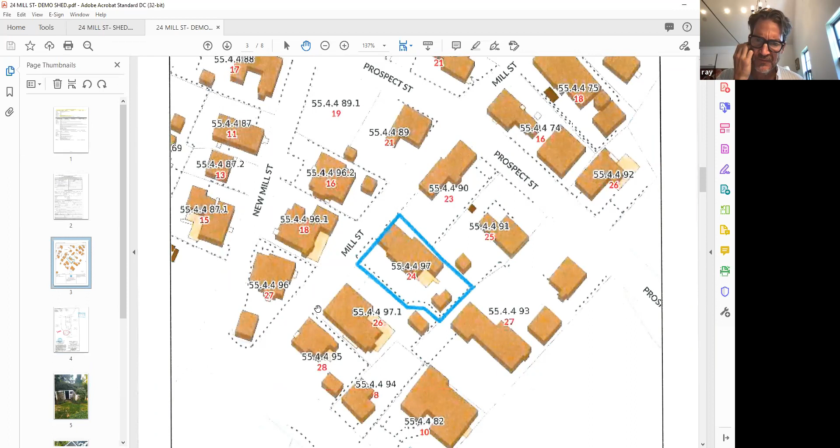Okay, so let's see, we just saw a site plan. Do we have a locus plan? And Holly, I know that you've probably got some stuff to say on this. Yes, sir, I do.

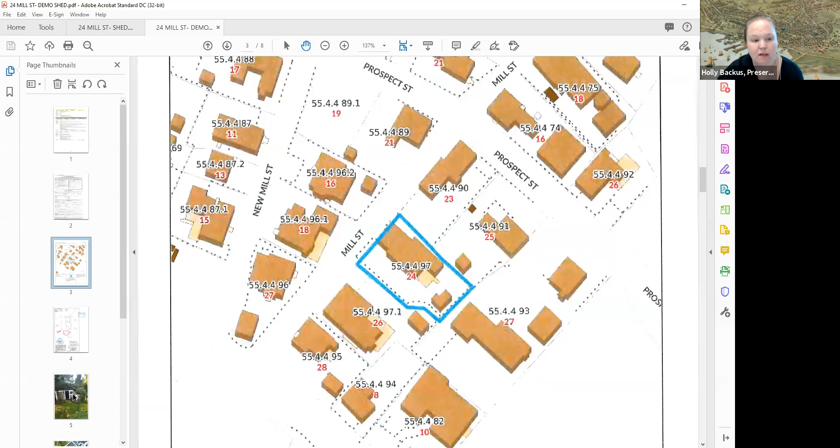So HSAB did take a look at this, as well as myself. They looked at this on August 9th, and their concerns are: what is the date of the existing shed? They would prefer to rebuild the older one rather than build a new one. I just want to note for the record that the main dwelling on the lot, per Mr. Lancaster, is dated 1834, and the NHA data indicates a 1900s cottage.

So I couldn't find specific information, but it would be nice to have some photographs of the interior of this cottage or this shed, as well as to be able to determine more information on that. Those are the comments, Mr. Chair. So can we see the whole package? Obviously, the package does not include interior stuff, right?

Okay, that's correct, that's correct, there are no interior photos. I don't know if this helps the committee date it at all, but I will say that the interior of the shed is almost exclusively made of plywood. So I don't know when that became available or when that was common to use for building a shed, but it is almost all made of plywood.

Well, that's actually good to hear, but we should probably see that before we move forward with this. So can you take some photos of the interior so we can go about this in an informed way? Happy to. Also, to that point, it looks to me like the door is sitting right at grade, so if you could take a picture of the floor—what's the floor, wood? Also plywood. The floor is plywood. Yes.

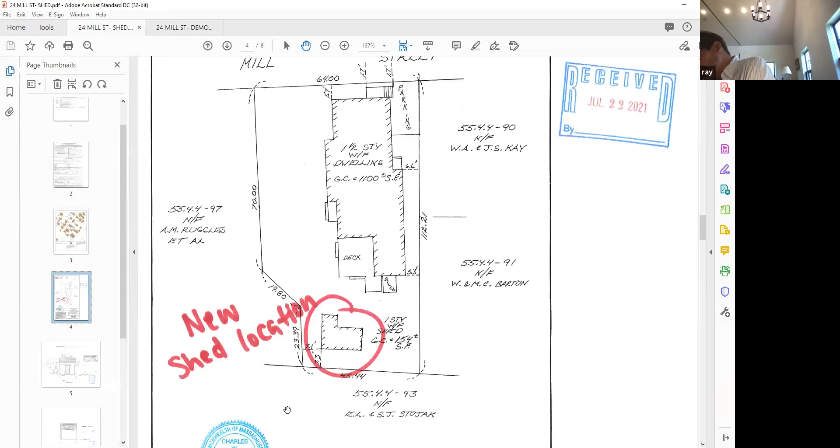Why don't we take a look at the new shed, just see what you got there. So these plans were, you can see the whiteout of the previously approved.

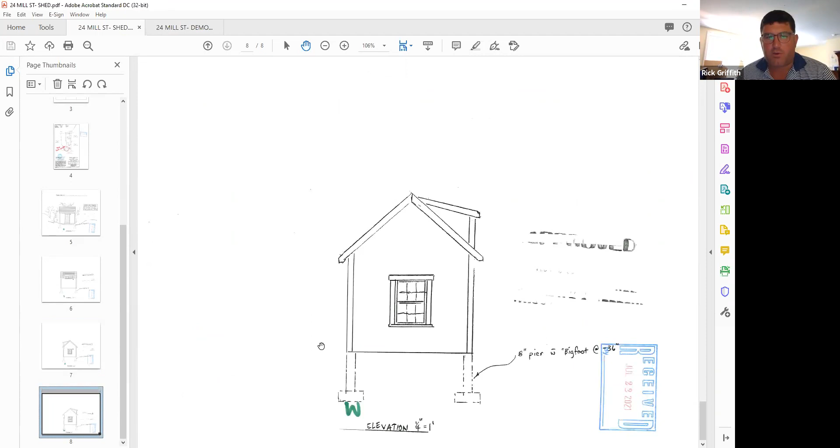So these plans were approved by the HDC, I think about 5 years ago. This is truly just a standard shed that is on a friend's property.

Oh, okay, so we didn't approve it for this location. No. Okay. Looks quite tiny. The only thing is it's about the same size as the current shed.

Really? The only thing that's changed is the height. I am 6'2", so when I go into this current shed, I almost inevitably hit my head on something. So the peak height of this shed, I believe, is 12 feet.

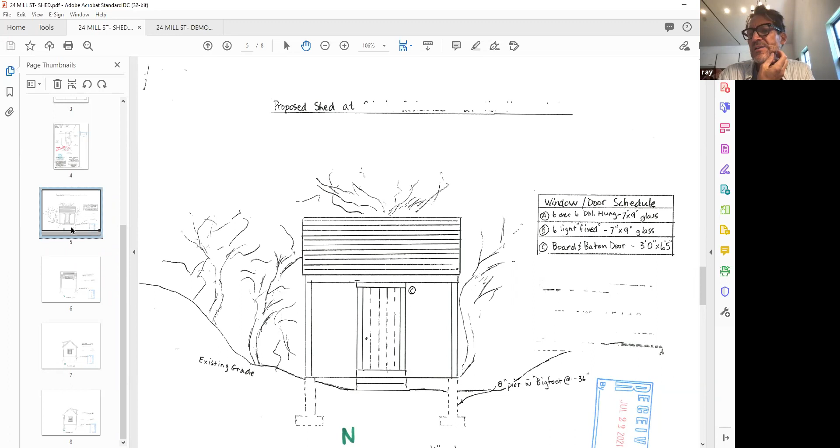So do us a favor, would you? Could you just take these little drawings of yours and put some dimensions on them? On the elevations, how high it is, how wide it is, et cetera, so we have a better idea. Yeah, happy to.

Or is that not? I thought it was on one of those. Maybe it's not on this one.

And Mr. Chair, I do have HSAB comments as well as staff comments. Great, go ahead. So HSAB said better drawings are needed to show the overall height and accurate window placement.

A better site plan is needed to indicate the exact location. And I concur, we need obviously clearer drawings, a more specific site plan. This is obviously the existing location of the existing shed.

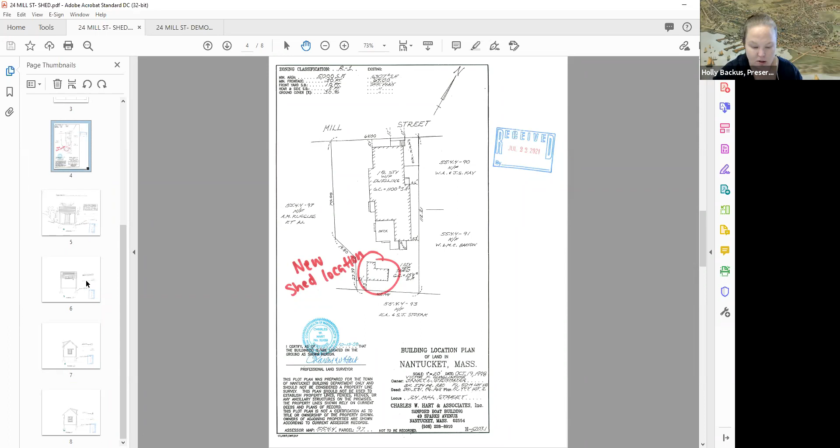Right, also I note that again, the main dwelling on the lot is a historic contributing structure. Right, and the architectural style really should emulate a little bit of that. And that are the comments. Thank you, Mr. Chair.

Okay, anybody, assuming that we get demo on the existing shed, I'd like to hear your comments on the new version, folks. Same board.

I think it's pretty basic. The only thing that's a little bit of an anomaly is the dormer. And depending which way it is facing, that may not be an issue.

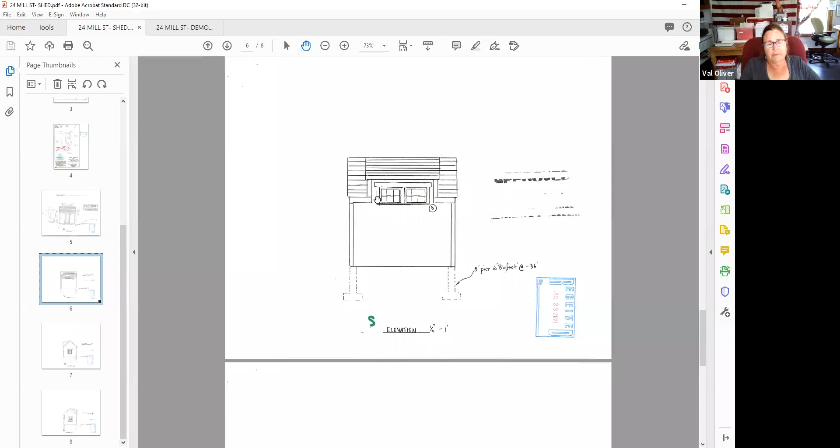I think it's facing the back property line. Is that correct? Yes, that's correct. Okay, so we would know that better if we had a site plan that showed the exact location of this.

Okay, that's it, Val, right? Yeah, okay, thanks. Abby, how about you? Yeah, I'm not in favor of this.

I'm waiting for information about the older shed. I believe it's probably turn of the century. I'm not sure about John's 1940 thing. Plywood could have just been put down to keep it intact. Looks like they shingled it at some point.

And I'm really tired of taking down these old buildings and then seeing these generic things come up. It's really sort of starting to get on my nerves. So I would probably not be in favor of something like this. Okay, thank you.

John: Yeah, the only thing I can say is my uncle had chickens also. I think it's appropriate. Okay, thank you. Diane: No, I'm a nay, for the same reasons that Abby is.

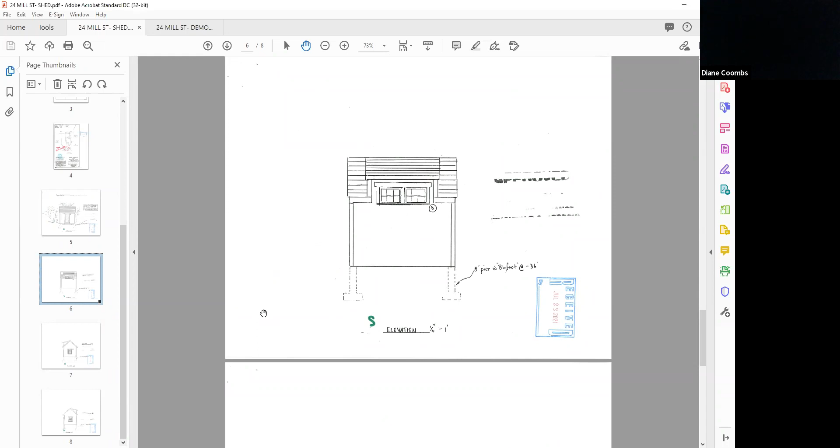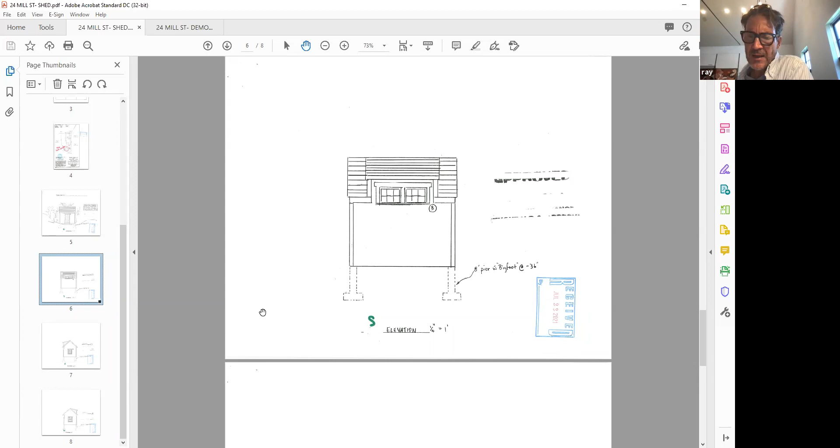Okay. So, all right, let's see the information on the old building and I guess we'll see what happens with this new building. So you have a few things you need to do to this just to clear up the application for us. And we will see what information you're able to provide us next time on the current shed. Thank you. So can I have a motion?

Motion to hold for more information. Sounds good. Thanks, Diane. On the motion: Val, Aye. John, Aye. Very good. Abby, aye. Okay, and Diane on your motion, aye, and I'm in favor too. So that motion carries. Thank you.

Let's see, driveway at 21 Pleasant, Edgewater. I saw Paul on there. Yes, I'm here. How are you? Very good. Good.

Okay, pretty basic. Recently purchased subdivided lot, just trying to put a new parking space in off Candle House Lane. One space, 14 foot on the street, 10 by 20, 10-foot deep brick apron. Used the neighboring property at 6 Candle House Lane to determine we should use brick as the apron. That's pretty much about it.

Paul, I'm hugely curious about this, and I don't ordinarily jump in. And we do have... Holly's going to speak to the HSAB stuff. Okay, why is it like 50-50? Why is it half brick and half gravel? I was just doing it for code, the 10-foot in depth. I would have no problem brick-ing the whole driveway. I think that would be appropriate. Okay, it just looks kind of weird. I understand, but I think a full brick driveway would actually be more appropriate.

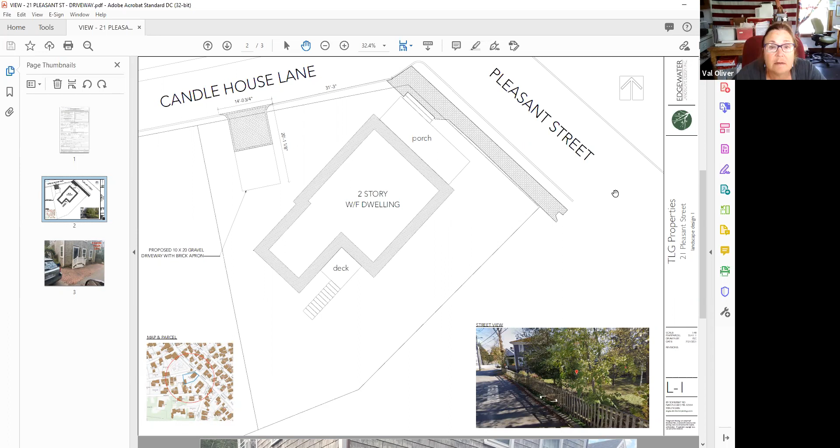I didn't drive down the street to see this. It looks though, from the photo which I was trying to blow up a little bit, the next door neighbor's parking - can you show the photo again - is brick. They just pull in like sideways, right? Right. Is that the photo that we're looking at right now? Yeah, that's right next door, I think. It looks like it's made out of concrete. The majority of the front is brick. There is that small parking area that does appear to be concrete, yes.

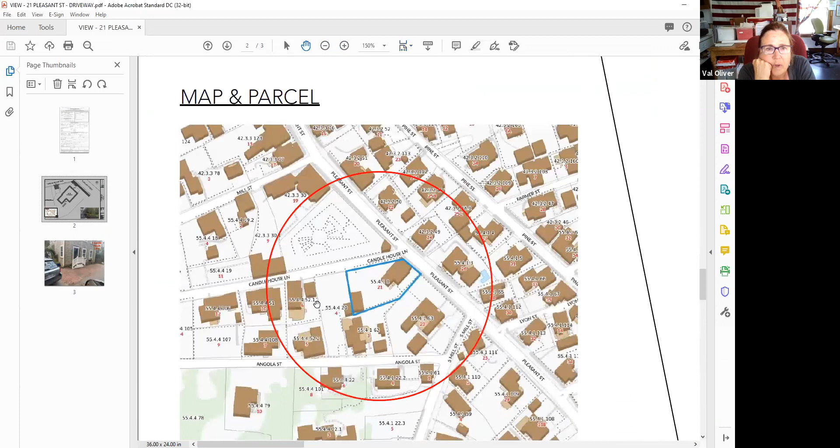Which I don't think we want to use concrete now. No, I'd rather not. No, of course not. But this would butt up to it, right? No, this is 2 doors down, so there is a lot between the two. Oh, I guess then I would just wait and see. I'd probably go by there and see what the other ones are.

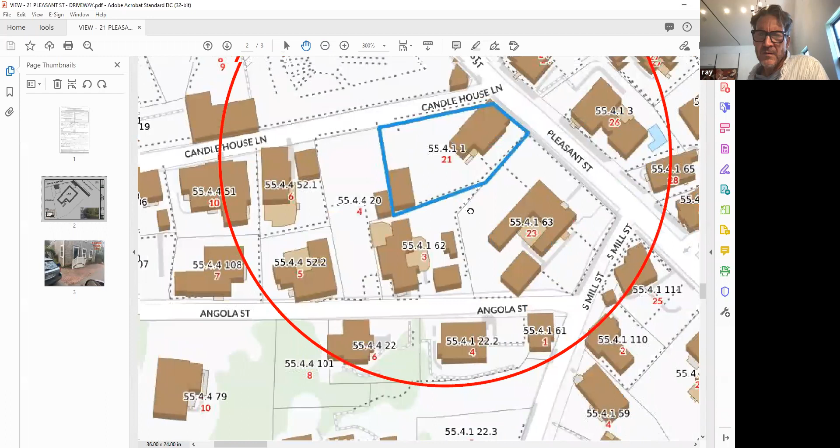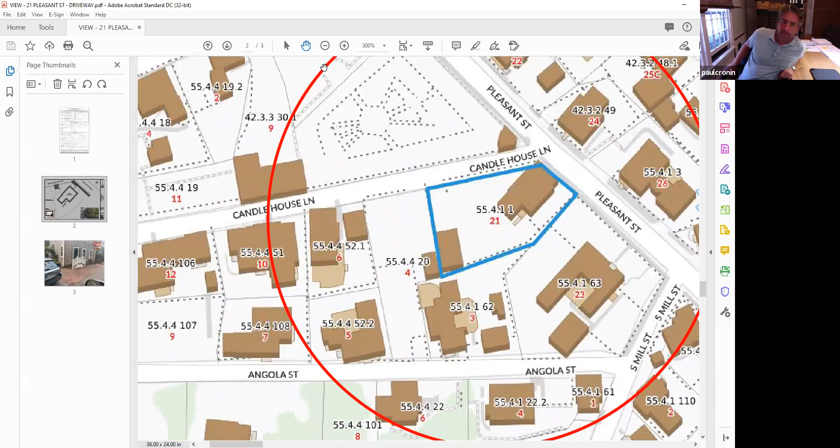Okay, I think brick or cobblestone would be fine. I think the whole driveway should be one material, so either all brick or all cobblestone. I'm with you on that one, definitely. Well then, I would go with the cobblestone, if that was an option. Sure. Now, when we say cobble, we're really talking about cobble, right? Not Belgian block? Not Belgian - that's block, no. Yeah, not Belgian block. Okay, just to be clear, because sometimes it gets muddy. Yeah. All right, Val, thank you.

How about you, Diane? Diane? Let's see, Diane there? Where's Diane? Diane, you're muted.

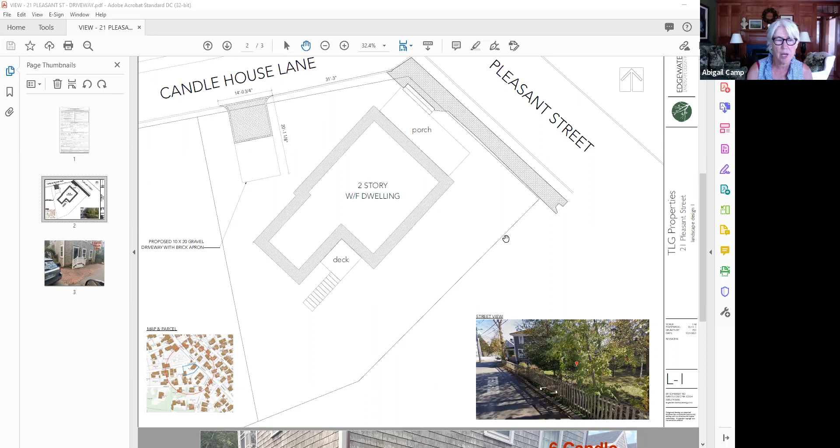Okay, let's go to Abby. I was curious about HSAB's comments about other driveways on Candle House Lane being cobblestone. I didn't know that, and if that's the case, I would go with cobblestone as well and leave the brick for Pleasant Street.

John? I'm in favor of that. Of it being cobblestone? Cobblestone, that's fine. Okay, so it hasn't quite come to a vote yet, but it looks like the vote might be for all cobblestone.

But I'm still trying to hear from Diane. Diane, you're still muted, dear. Can somebody unmute her, please? There, can you hear me now? Okay, now I got you. I don't know why it keeps doing that.

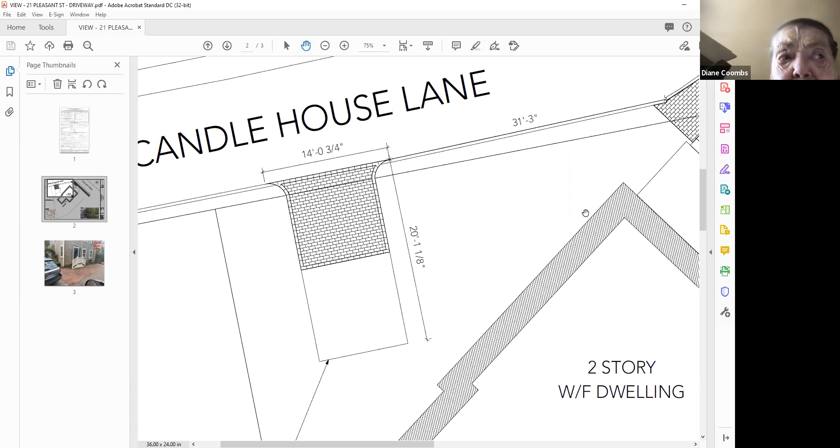Anyway, I would like to know what else is on Candle House Lane for aprons. I think the brick is too formal for Candle House Lane, and if I'm given the choice, just off the top I would take the cobblestones for that reason.

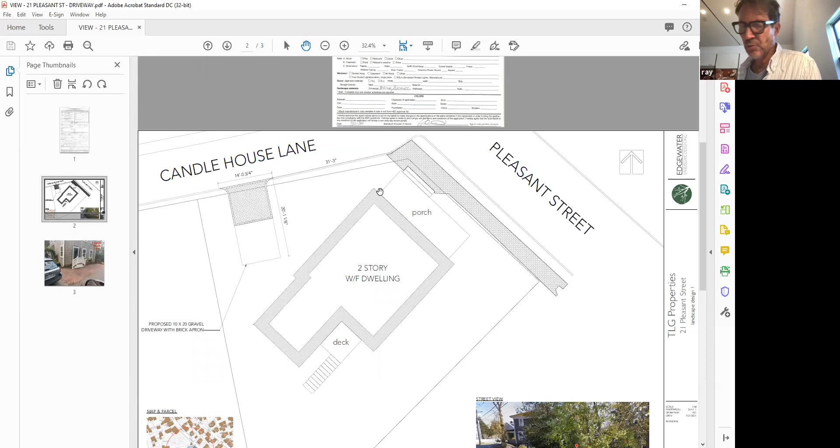Well, Diane, I think everybody's in agreement on this one, that cobblestone would be a good choice, and rather than it being 50-50, it would be 100% cobblestone. Right, 100% cobblestone. And I'll make that motion if you want. That would be great.

Thank you, and so Diane has made a motion to approve this as all cobblestone, folks. On that motion, Val? Aye. Very good, thank you. John? Aye. Great. Abby? Aye. Thank you. Diane on your motion, Aye. And I'm in favor. Fantastic. Thank you, Paul.

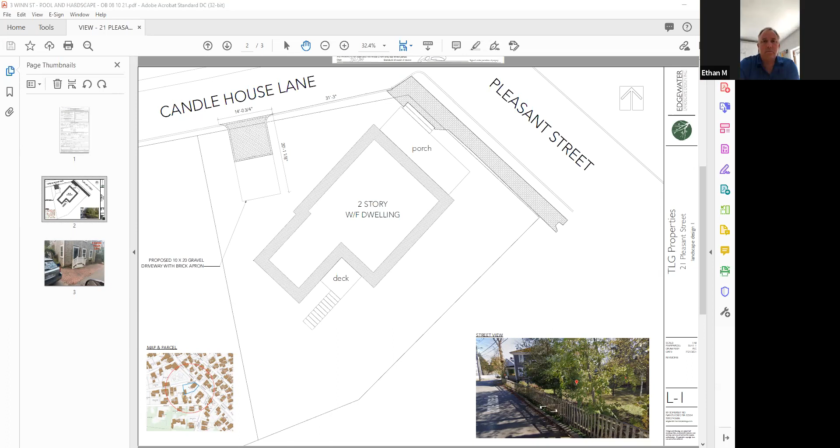All right, next up we're on to old business of August 10th, very short. Do we have somebody here to represent the 3 Winn Street applications?

Yeah, can you hear me? This is Ethan. Hello, Ethan. Yeah, hi, I didn't know I was on this because it said self and my name's not on there, so that's why I'm here now. Okay, go ahead, I'm here for the house.

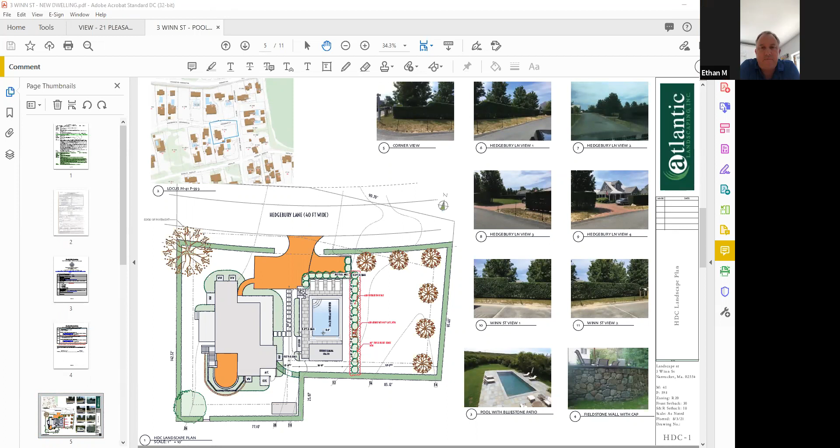So basically it's a second dwelling and the style is to match the main house. Oh, yeah, we're familiar with this because this was the pool thing that came up last Tuesday, right? So we're gonna actually hold the pool until this gets approved. It looks like the guest house is sitting right in the pool.

It's because we have all the setbacks on Hedgebury and the setbacks on Winn Street. We have to be 30 feet, so we have to put it in where it can go. Okay, all right, good enough. So I'm gonna jump off, I'm gonna just hold my application for revisions, if that's okay. Yeah, we'll hold it for you. Okay, perfect, thanks guys.

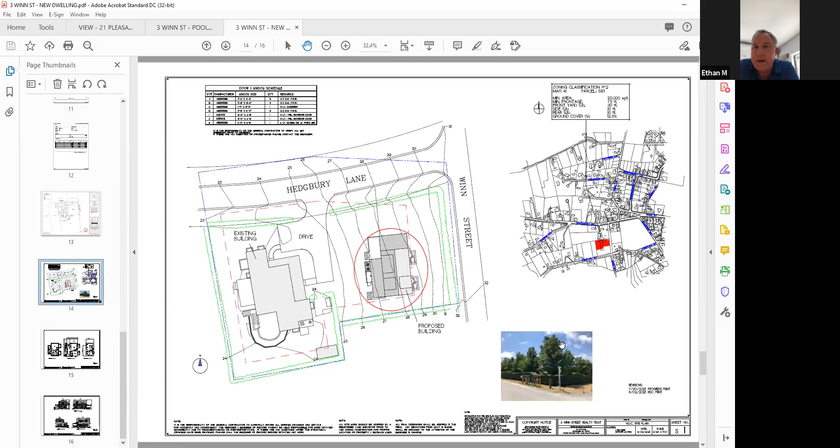Okay, so go ahead, Ethan. So basically it's a second dwelling, 22 feet high plus or minus, and the style matches the main house in all the architectural elements. That's it. Well, the location of it on the lot, that's where it can only kind of go because of all the setbacks and the grades and everything. So that's it, new house.

Is there a picture of the main house, Ethan? There is, if you scroll up. Oh, I included it, God bless. There we go. The only thing I didn't do is put the brackets on it. He doesn't like those, he wants to take those off. Eventually he's going to do something to the house. Well, we tend not to like those square brackets, we like them when they're curved. I'm just kidding.

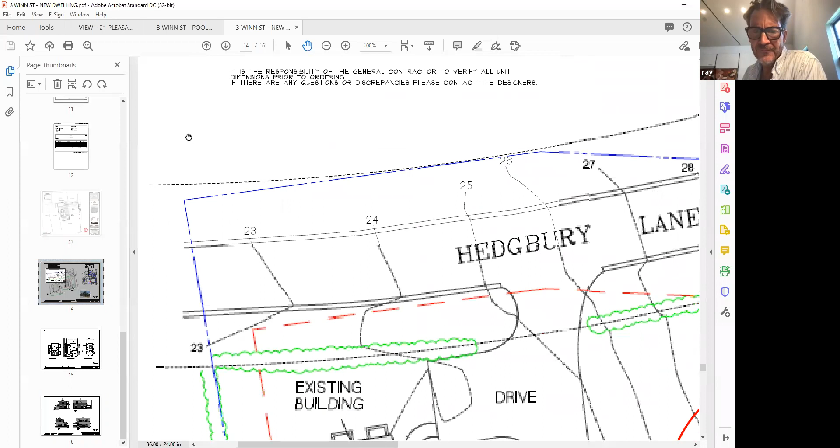So who wants to start? I just want to look at it again. I think it would be good to give it another look over. White trim, it's 22 feet high, correct. 22 feet, on the money. On the money, that's not on the money, often.

the north elevation, which is facing out to Nantucket Road? Yes. Okay, but this is back, so it won't be seen, right? Yeah, there's a photograph from the road, it's all vegetation, you can't see this. Okay, well from Nantucket Road you can't see it, you have to go right up to Hedgebury. Well, Hedgebury is a public road, so we have to think of that. Can I go over to the west elevation?

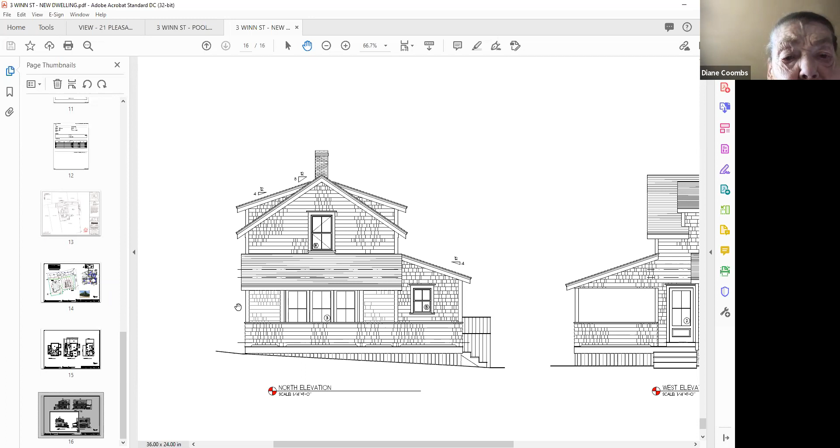Okay, I think on the west elevation, the 2 dormers up above, I'd like to see them brought in a little bit so that they weren't quite so wide. It will make the roof a little smaller to the eye. It's just a suggestion.

So now if I could see the east, there's the east, same thing with that. The dormers, I think with the house keeping it only at 22 feet, the small reduction on the dormers would be good.

And the south is the south sort of the front entrance? Yeah, well, looking, you can't, yeah, there's 2 entrances, so it's whatever they decide to use when living there. There's one and there's one around the corner.

So that's my suggestion at the moment. I appreciate the height that you got it, I appreciate that it is at 22 feet. I just would like to see the dormers reduced, which I think keeps the house looking small.

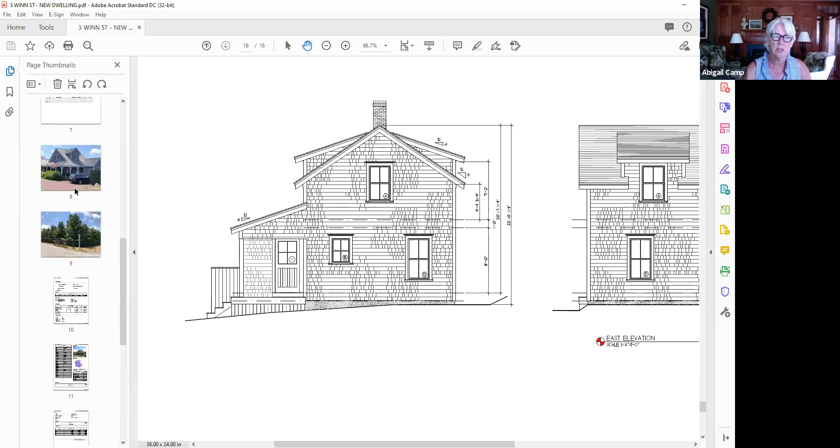Yeah, I think it's pretty adorable. My only question, I'd love to see them side by side, the main house and this, to make sure that the same details were the same, like maybe just the window. Are the windows the same size? Yep, everything's matching except for the brackets.

Very cool. And I kind of, I see those big dormers, but that does look oversized. I think I agree with Diane to bring those dormers in a little bit. Otherwise it's beautifully proportioned. Thank you.

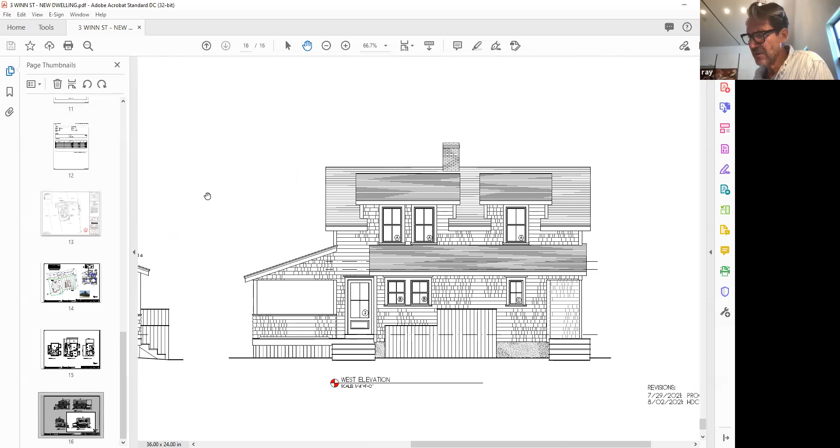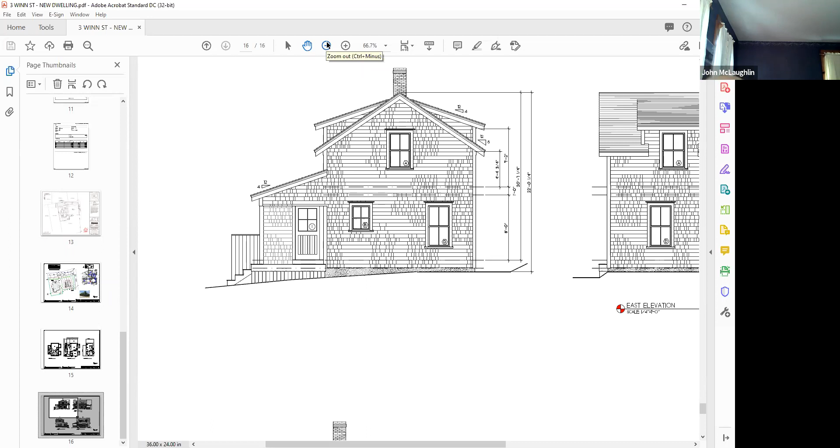Okay, very good. Thank you, John. And how about you, Val? I think it's appropriate.

Okay, so Ethan, can you give us a little sugar on this and make those dormers a little narrower? I can make them narrower, but because of code with the bathrooms, that's why the house is so short.

We're talking narrow in width, correct? Yes, I can do that with the west, I can bring it in a couple inches on either side, but the other one's kind of a toilet, and I need that 6'8", and it won't work. Otherwise, the toilet will be in the window, and I don't want that. That's on the east. But I mean, I can.

So you're suggesting keeping the east elevation the way it is, and doing the other one, just because of the bathrooms? I mean, you do understand what we're talking about, it's just bringing those corner boards in a little bit closer to the windows. Yeah, I can. That east one is a bathroom toilet. The other ones can come in 6 inches on either side, which would help.

Okay, that would be great. All right, so I'll make that the motion. Let's move it along. Was that a motion? Yes. Okay, so the motion is to approve this through staff, just taking the dormers on the west elevation and making them 6 inches narrower on either side. Did I get that right?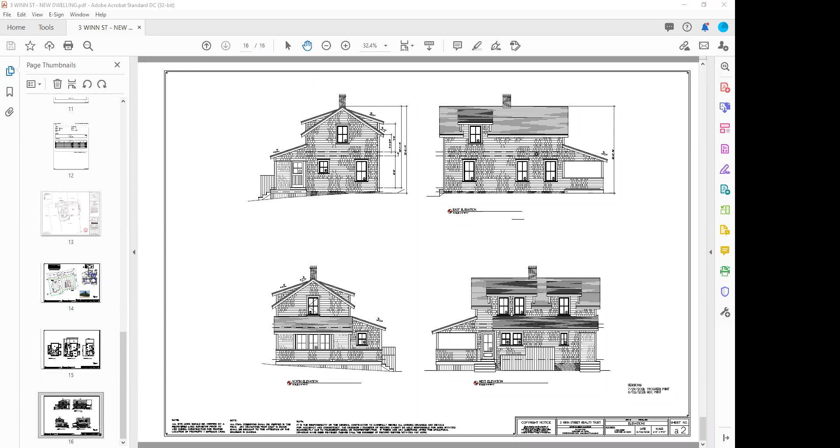My recollection is that Stephen was the one who pointed out he was looking at the house application, which we did not have, and said he had an issue because the guest house seemed to be in the same location where the pool is being shown. So the board was established for Stephen to make those comments, and then they held it for the house, which we just reviewed but had not yet been reviewed. So we need to hold this application.

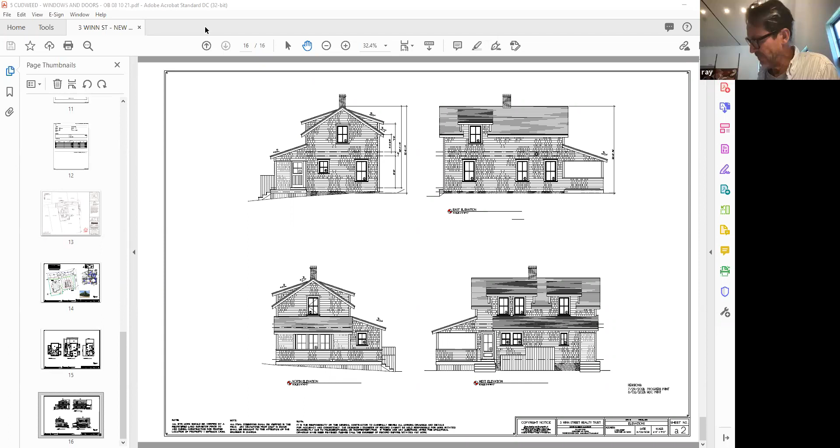So Stephen, can I have a motion to hold? So moved. On that motion: Diane, aye. John, aye. Abby, aye. Stephen, on your motion, all right. And I'm in favor. Okay, that's good.

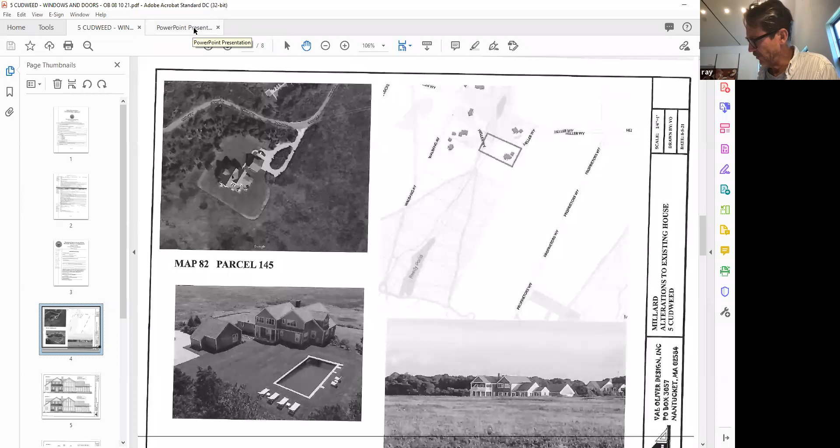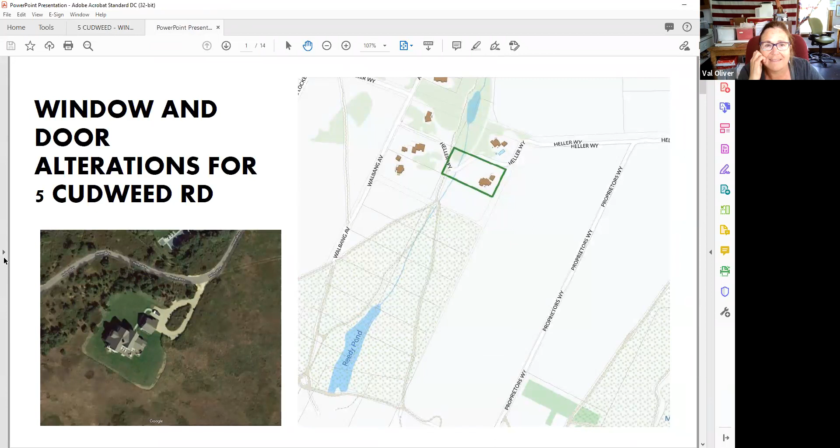Next up, Val Oliver. I just want to make sure I got the right one to Holly. Oh, you want to look at it first before we start?

Okay, well oddly, we have a board on this. Okay, I think it's the right one. Who's the board, who's on this? Can I step out for a second? You're on it, Abby. You're on the next two. Okay, and you liked it, so please stay. Okay, all right, I just got an emergency telephone call. It's a nice emergency, so go ahead. You like nice emergencies.

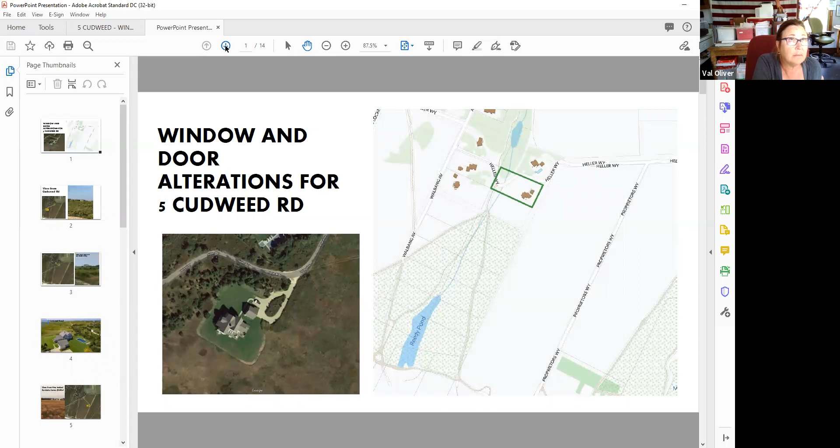Okay, so Val, why don't you begin? We know, board members, you know who you are. Yeah, this was looked at in July. The crux of it is we want to change some fenestration on, I think, the south and east.

Part of the proposal was well received, even though the fenestration is asking to change and become larger, because all the windows are going to bronze, which is like a dark earth-tone color. And the trim, which is now white and makes this building very evident, is going to be natural to weather. So there were some comments about the proportions of the glass, so I revamped it, and at the end Stephen, as an alternate, said he'd be interested in seeing something that was like a window wall.

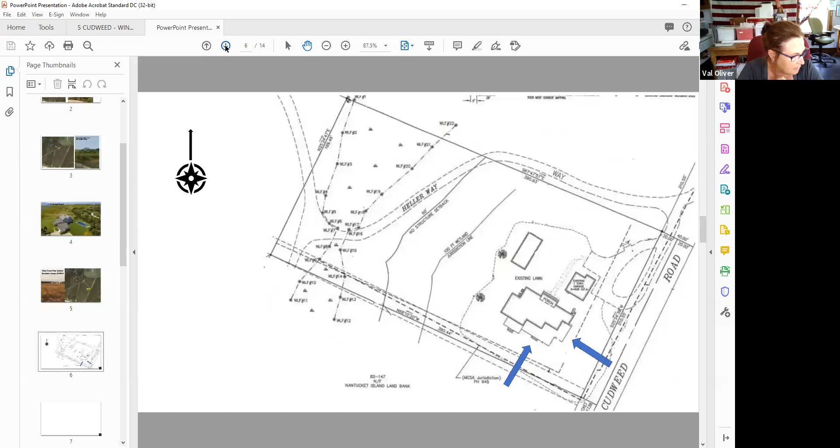So I am presenting a couple of those as well, but there are 4 choices here, from the first presentation, and I think Diane liked it as well. So this is the existing house. This is a new presentation. The smaller size was the one I gave before.

We had chunkier doors down on the bottom and smaller windows on the top. This is obviously a stretch, but the first two are window walls. At the end of this I have a picture of one that's here, at Tristram's Landing, but I thought it was good to look at because with the natural to weather it kind of just blends in. The next page has some more window proportion changes. So really you have 4 choices here, and the east is the same on all of those.

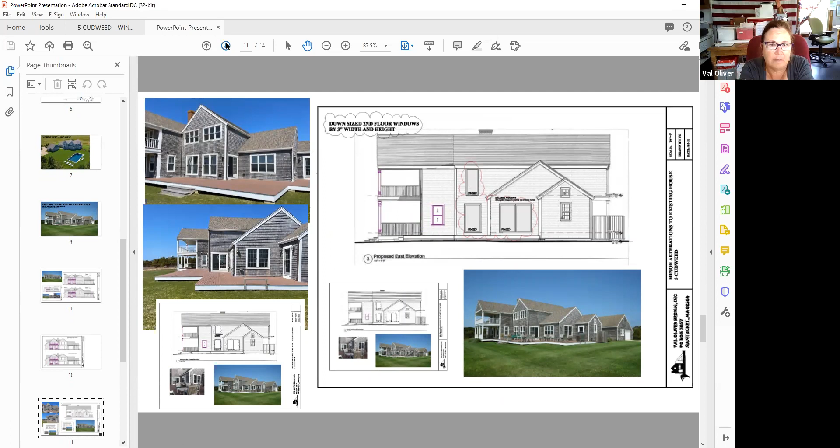The east being this, just the bubbled ones, are all the same for any of the other iterations. Options. Holly, if you can scroll farther to the end, I just wanted to point out there are some odd windows here and there in town that I've never even noticed, which was interesting. This one's down at Brant Point, and the next one is out in Tristram's Landing, obviously. But it was just to show coloring and all of that.

Which is why the HDC was formed. Okay, thank you, Val. It's Abby, John, Diane, Carrie. Who would like to begin? I will, thank you John.

Looking at option 1, basically that's a custom window wall. I just think it's over-fenestrated with glass. That's too much, it's way too much. You've got to cut down something else. It'll be more fitting for the neighborhood. Show him the next slide.

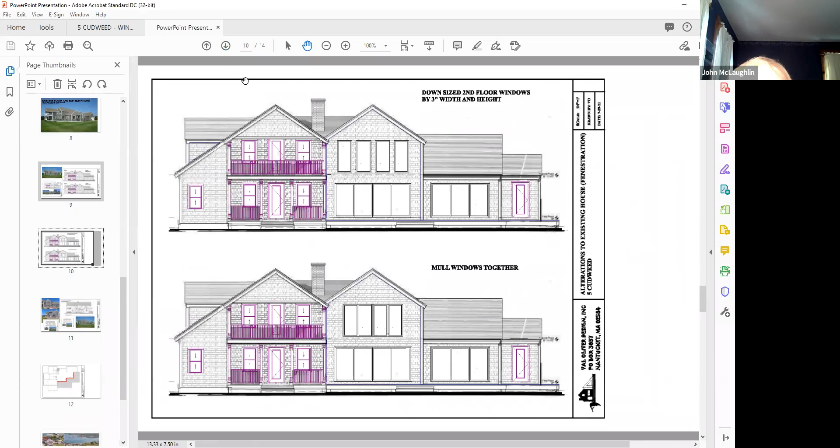Yeah, you have it. They should make some changes in all that glass. John, this is the next page, which is another option. Another two options. Okay, what's the other option? Well, there's two here. One has the second floor windows separated and one has them all ganged together.

There you go, right where the little hand is. I think it needs more double hung windows than glass on the right side of the second floor deck. There's too much glass in it. It's over 50%. Okay, thank you. Thank you, John.

Diane, where are you on this? Val, is this an upside down house? No. Well, I like the house and I think it's great, but I do think the addition on the right has got too much glass. I would like to see going down to the third option there, and perhaps have 4 windows up on the second floor. And I could live, which I don't usually do, with them mulled up on the second floor. I think you can look at the existing picture and compare it.

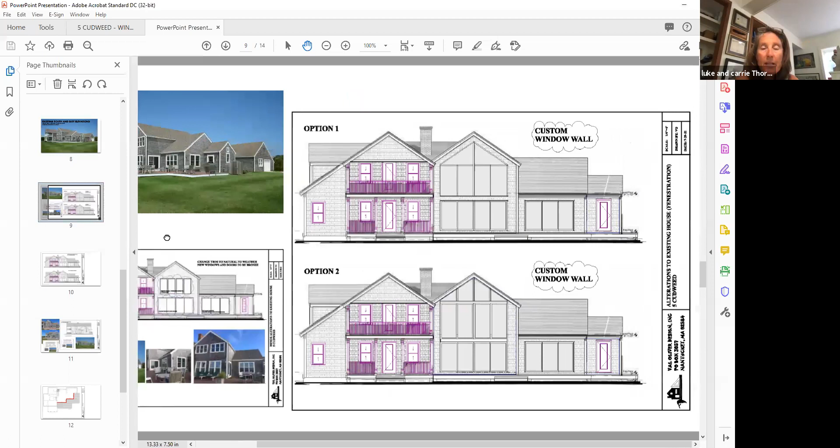Carrie? Am I on? Yes. I like the fourth option the best, that one. Although I don't really think the smaller mass on the right should have the big doors, because this piece is reading as the glass element and the two side pieces, the larger on the left and the smaller on the right, both would have the double hungs. So I kind of feel like it's too much with the right-hand mass also having the big glass, but just having that one feature wall with the four and four, in my mind, makes more sense to just feature one wall.

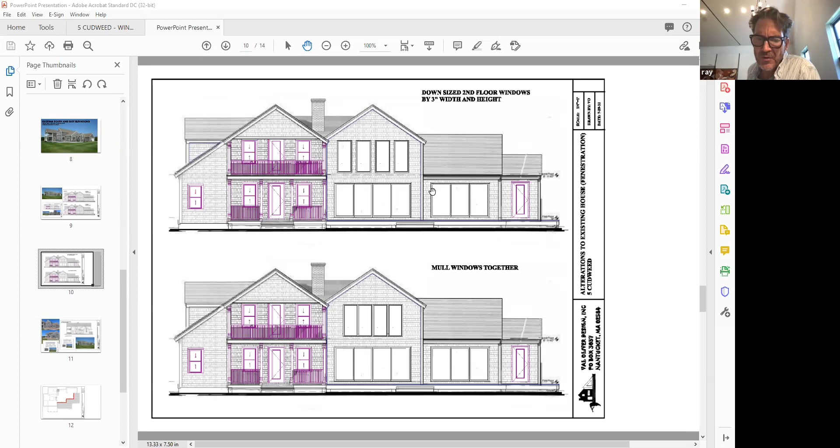By the way, Val, those three sliders that Carrie's talking about, is that part of your new proposal or are they already there? No, we were changing out three windows for doors, and I was trying to have all the doors in that area all be the same size. Okay, thank you.

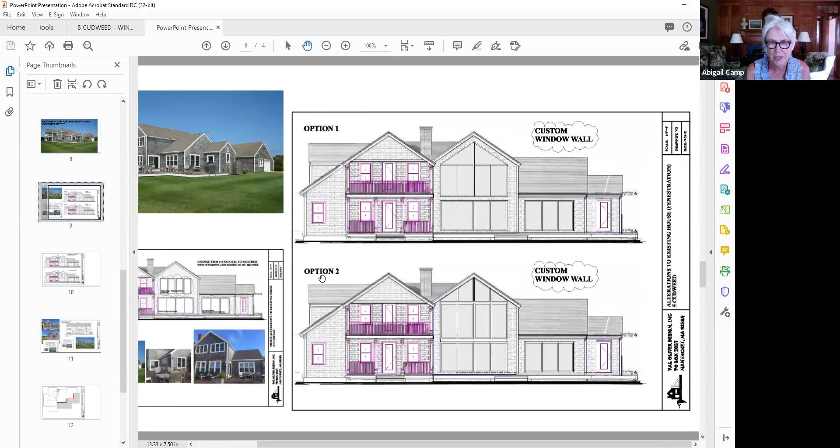So that was Carrie, and now Abby. Abby, you're... sorry, this is a lot of fun. I like, behind the green door, option 3. Which is that one, yeah. I like the separated four windows on the top, and I love Carrie's idea of making that the central focus, that main mass, and then having the one to the right be subordinate and sort of mimic the other far left. Sort of make that more, just what you have on the left, just reiterate that on the right, and that will give it some door in the middle, windows, double hung windows flanking the door. Yeah, I mean, something like that might give it some balance. Right now it's sort of a hodgepodge, and I think it needs something to clinch it.

So, Val, it sounds like... revisions, yeah. It sounds like if you did the door plus two double hung windows, you're probably going to be better off with your option 3 with the door plus two windows, where you're showing three sliders right now. Okay, I'll just hold for revisions, because maybe we'll just leave what's there. Let me see, okay.

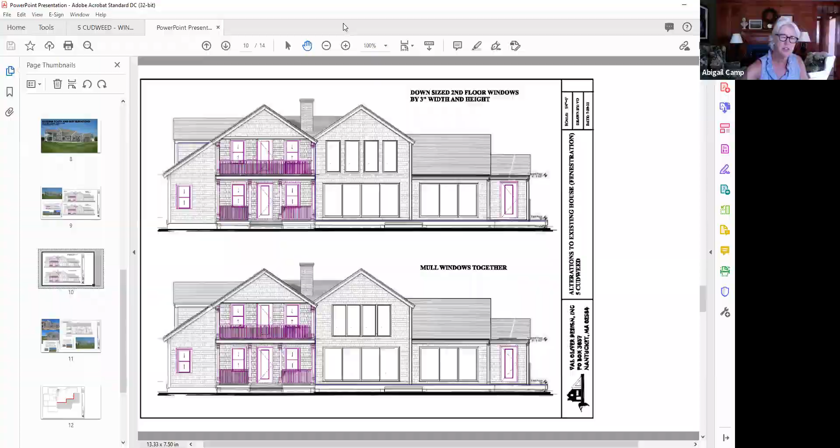Okay, all right, can somebody give me a motion to hold for revisions? I would make that motion if you wanted to do that. But wait, I think 'leave what's there' means leave everything the way it is, right? No, no, Val, no, no, just where those three design doors are. Oh, okay, to put in hold for revisions and see. Yeah, let's hold for revision. Okay, that's my motion, or that was actually Diane's motion.

So, on that motion, Abby, aye. John, Mr. Chairman, I made one mistake going back to that house. There are three glass doors and neither one is designated as a front door. It's on the first floor. The front door of this house is actually over on the other side. But John, are you in favor of the motion to hold for revisions? Yes. Okay, great. Carrie, on the motion. Aye. And Diane, on your motion? Aye. Thank you, and I'm in favor. Motion carries. Thank you, Val.

Thank you, everyone. And now we are down to 12 Straight Wharf. We have some information, and we have our board established. Abby, you're still on this, so hang in there just for a moment longer. This is the one that was wrong, that we talked about, that Abby is not on. She was, yeah, her name in that list is a mistake. It's you, Johnny, Diane, Val, and Carrie. Abby and Stephen were off. I think Abby had left or something. Got it. Okay, so actually, you're right, up we go, Abby.

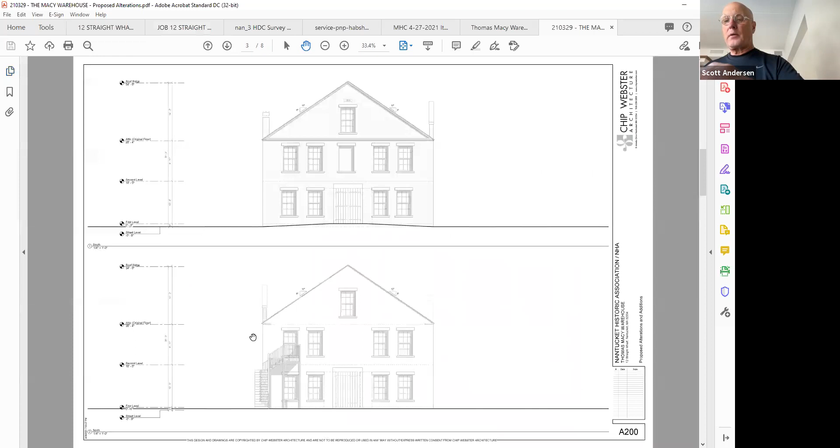I know we use glass doors in the Whaling Museum because I've done a couple other exhibition areas in there, so it doesn't appear to be a fishbowl, and we don't try to make it part of the historic fabric of either building. I know they do that throughout the country.

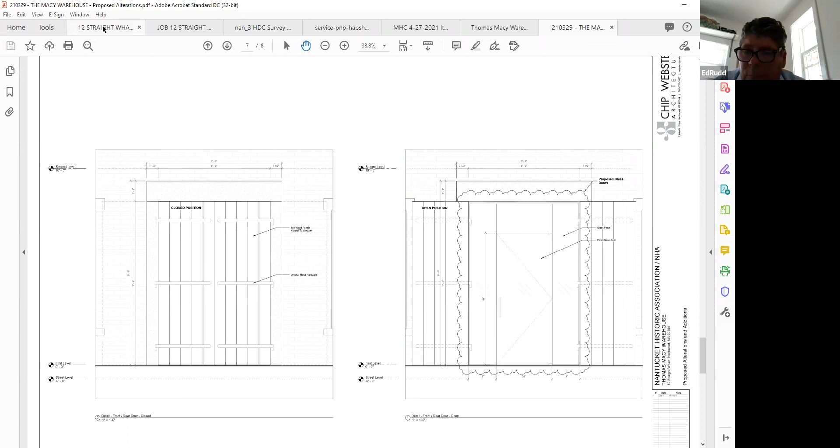Can I just put in too that we did have an architect who visualized almost like a Boston sort of representation of what maybe a building would be presented in Boston — something like that, with a front desk in the middle, swooping staircases, a lot of bits and pieces in the building. We totally turned that down because we wanted to keep the building all the bare bones. You can see all the bare bones in the building.

So with us running around thinking about lighting, which we had a great deal of going back and forth and trying out lighting, we wanted to try to keep the lighting as minimal as possible and have as much daylight be able to light up the building itself. So that's another reason why going with the glass and having it open in a fishbowl effect.

Because everything you can count on your hands, how many holes were actually put into the beams to hold the lighting, the fire suppression — we hid all of that. I think we thought it out pretty well for the interior.

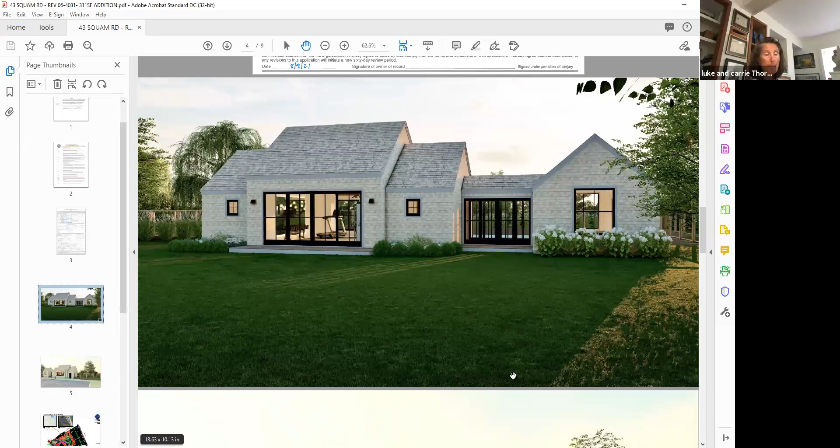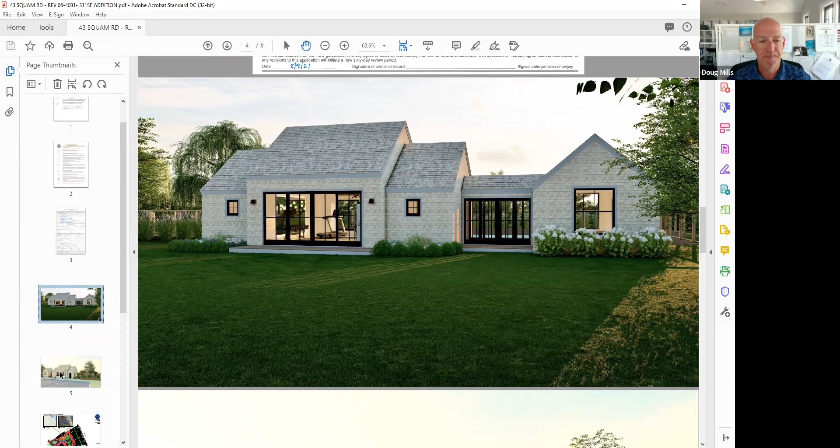Go ahead. So this is a gym building that was approved a couple of months ago, and the image you're looking at is a rendering we've done. The center part is what was approved before. The part to the right, the connector and the other gable, is what we're adding.

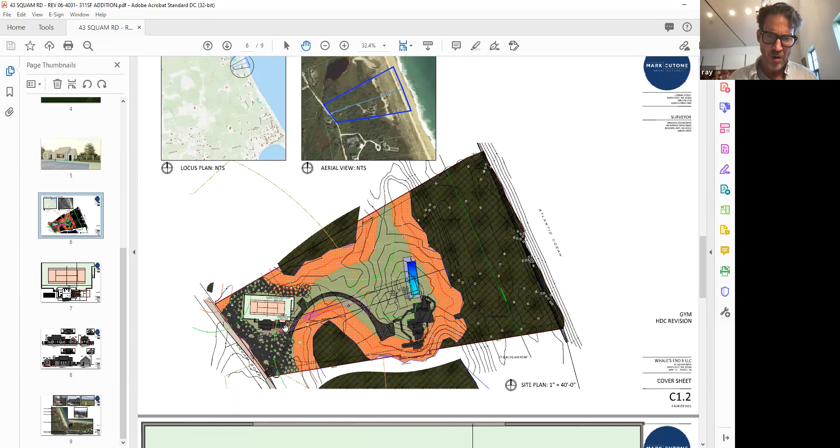So where you have those multi-doors plus the gable on the right-hand side, that's the addition. Correct, and we just saw it from the other side, from the court. It looks to me, Doug, like this piece is closer or further away from Squam Road than the piece that we've already approved, is that correct? That is correct. So it's basically closer to the water than it is to Squam Road with respect to the building that's already approved.

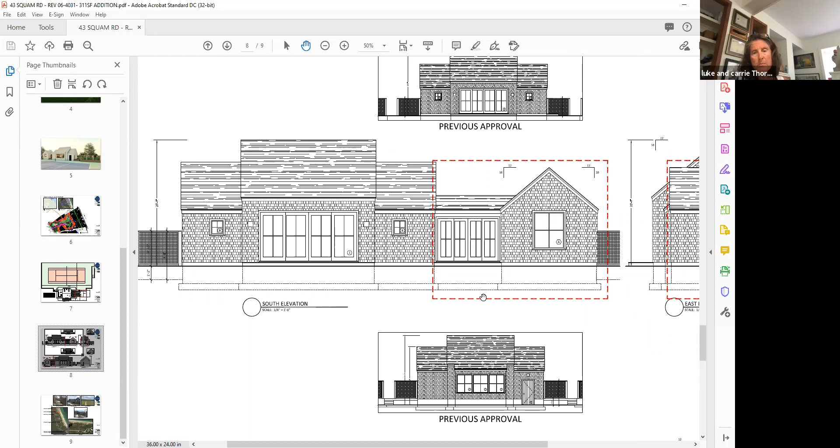Did anybody want to start on this one? I'll go. I'm just wondering if the street side of the connector can have less glass. Which side is it, is that south? Yes, the street side is south, it's labeled south here. Yeah, I think because it is relatively close to the road and there's already a ton of glass, that connector would be better served with less glass, at least on the south elevation. Okay, that sounds good. That's your one comment? Yeah. Very good, thank you.

Diane? You there, Diane? You're muted, dear. I've undone it, I wish. No, you're good, you got it now. I wish we could do something with them so they stop muting us without us knowing it.

Anyway, I think that the building is very nice, it keeps a low profile and has multi-side heights, very good. I think Carrie's right to reduce the number of windows in that little transition place, either have it 2/2, doing the shape of those doors, not the square ones which is really bad, just those, and not have the complete full window. But I think the house is nice and will fit in there very well.

Very good, thank you Diane. Let's see, Val? I agree with what's been said. Okay, Stephen? I concur.

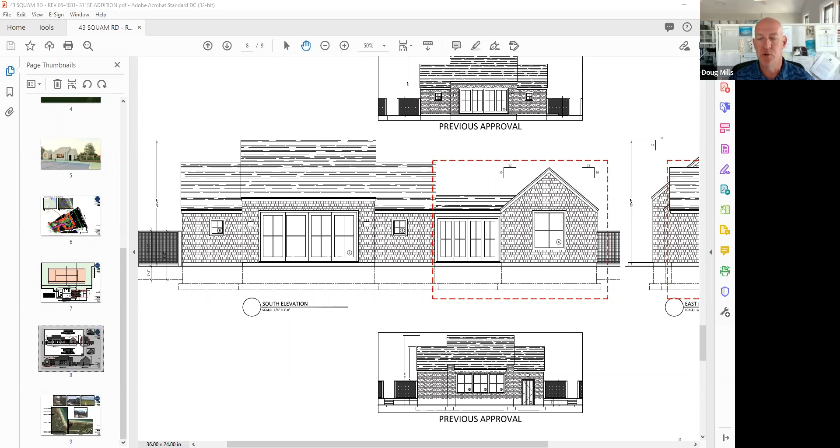So it sounds like all you need to do, Doug, to get an approval is on the south elevation, you want to go from 4 windows, those 4 sliders, to what are we suggesting? How about if I do hinged, like 2 hinge doors, the size of the doors that are there now rather than the 4? I'm okay with that. That basically is half the amount of glass. Yeah, that sounds good to everyone? Yep.

All right, can somebody make that motion? Can we do it through staff? Sure, through staff, to reduce the 4 windows to 2 hinged doors on the south elevation, in the connector piece. So that's Diane's motion. On that motion, Carrie? Aye. Val? Aye. Stephen? Aye. Diane, on your motion? Aye. And I too am in favor. Thanks a lot, Doug, thanks very much.